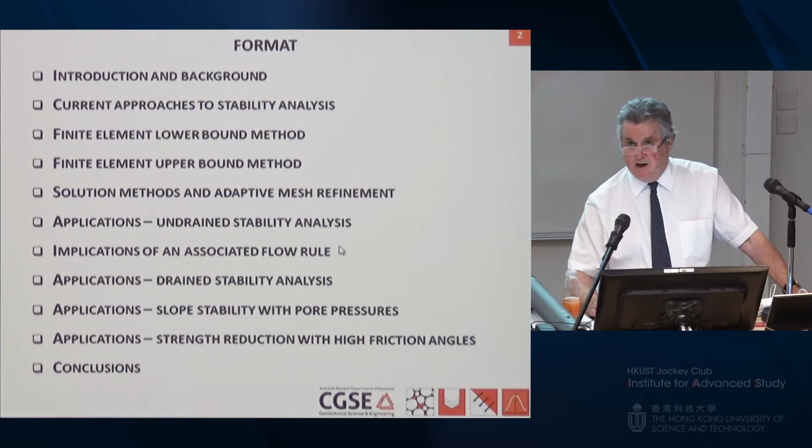Then I'm going to do some applications for undrained stability analysis, then look at the implications of an associated flow rule. For high friction angles, there's always a question: can we use these techniques for those types of soils and geomaterials in general? Then some drained stability applications, then slope stability where we incorporate pore pressures - this is a very recent development - finishing up with strength reduction for materials with high friction angles, and then some conclusions.

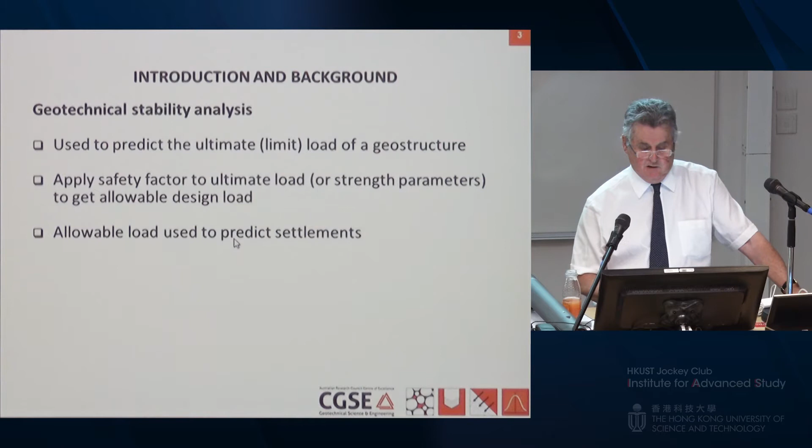Geotechnical stability analysis is used to predict the ultimate load capacity of a geostructure. Once we have that, we typically apply a safety factor to it, or to the strength parameters, to get the allowable design load or working load. Once we have that allowable load, we can use some other technique, such as displacement finite elements or even theory, to predict the settlements for the design structure.

Four common causes of geotechnical failure that I think are very important, probably the main ones: inadequate site characterisation, poor construction practice, activity after construction such as tunnelling in particular, and incorrect method of analysis. These are all very important, but today I'm just going to talk about this last aspect.

So why is it important? Well, first of all, we have cost pressures driving the engineering profession to use ever lower safety factors, and the social and economic costs of failure can be enormous and are increasing, as are the legal liabilities associated with failure.

There's also a community expectation that, hang on, engineers can put a man on the moon, surely we can design a retaining wall or a tunnel that doesn't collapse. So the community expects us to be able to deal with these sorts of problems involving complex material behaviour.

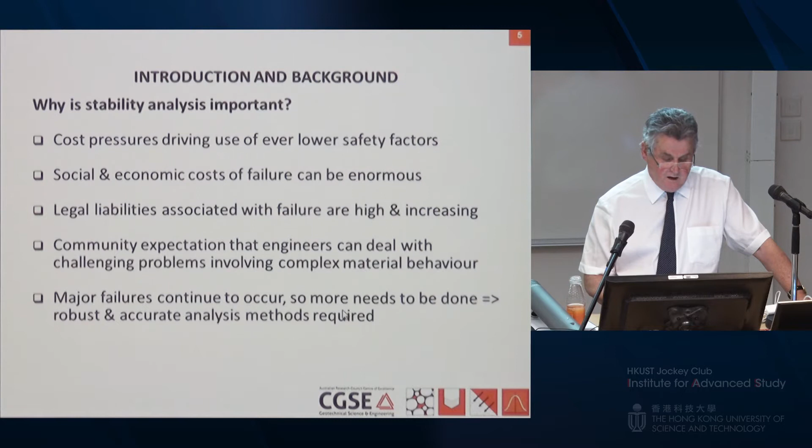However, we note that major failures still continue to occur, so clearly more needs to be done to develop robust and accurate analysis methods.

Excuse me if my throat is a bit froggy. I think I've picked up a bug in China where I've been for the last 2 weeks.

Examples of some failures. This is the road south of Sydney. This slip occurred after heavy rainfall. It cost about $50 million to fix that. It had to be completely rebuilt and re-anchored.

A Lane Cove tunnel collapse. This was part of a $1.1 billion project in the centre of Sydney. The heading collapsed, causing a depression to occur. This multi-storey building had to be evacuated, and it caused the partial closure of one of Sydney's busiest

arterial roads. Energy infrastructure failure. This is the Yallourn open cut coal mine collapse, 2007, 6 million cubic metres of material. That mine was 80 metres high, 500 metres long, and went so far back that it diverted the Latrobe River into the mine, causing partial closure of the mine, 20% loss of Victoria's power supply.

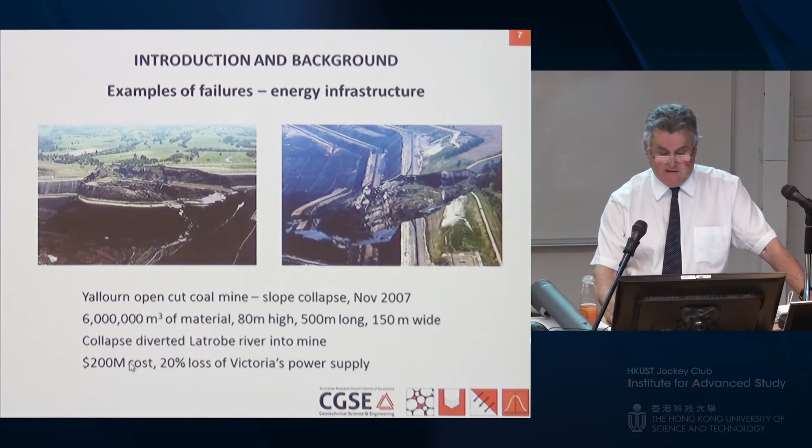Victoria is a state in Australia, a bit like a province in China, and so this was a massive cost and a massive loss to their power infrastructure.

Another failure, a Jackup rig failure off the coast of Kuwait, September 2002. This is where one of the legs punched through a stiff crust into a soft layer underneath, started to tilt, and eventually the whole thing sank. $350 million for that rig, and we're getting at least one of these failures every year, quite often two.

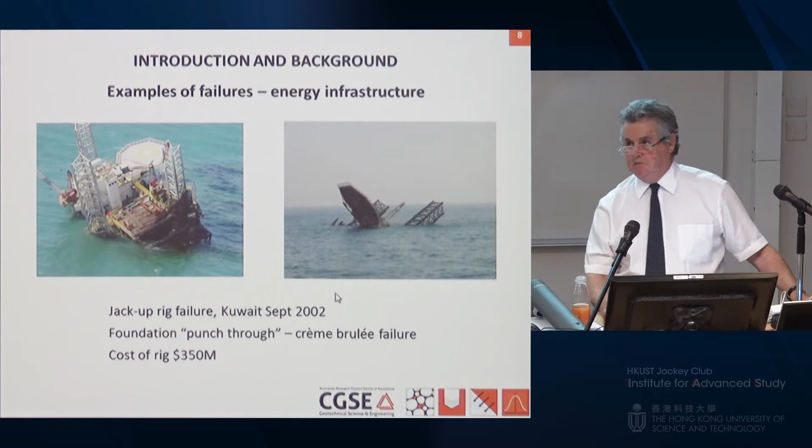So we still haven't got our stability analysis right. So let's have a look at current approaches.

Limit equilibrium, this is the one you all learn as undergraduates. Limit analysis, some of you will be familiar with this, where we have upper and lower bound theorems and we use analytical approaches to calculate those bounds.

Slip line methods, which are related to limit analysis, but we solve the governing plasticity equations using the method of characteristics. I'm not going to say a lot about this method, not because I don't think it's important, but because it's not possible to develop general purpose computer codes that employ it. You can get very important solutions out of them, and you'll see some of them in this talk.

And last but not least, nonlinear displacement finite element analysis, which everybody uses in lots of different areas in geotechnics.

So what are the key things about limit equilibrium? You have to postulate a failure mechanism in advance, and it could be a circle or a wedge or some other shape. You then optimise that geometry to get the critical safety factor. Huge number of methods developed.

Some of those are listed there, typically based on very simple soil models, such as Tresca or Mohr-Coulomb. Most of the methods are based purely on statics, not all of them. There's one or two important ones that aren't, but generally we tend to ignore the kinematics, and assumptions are required to make the problem statically determinate.

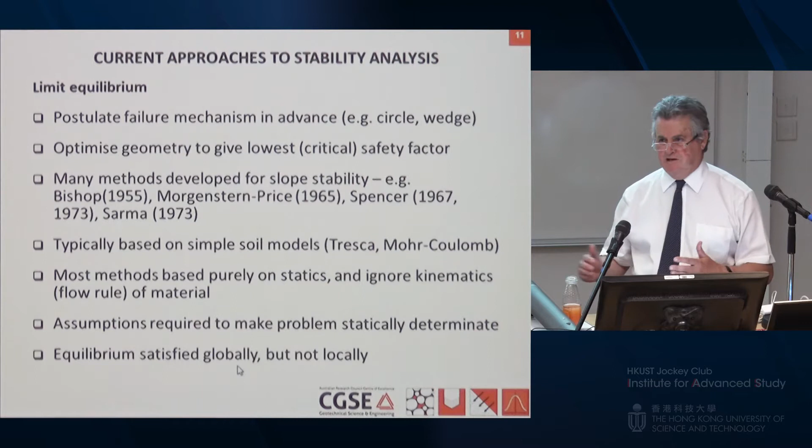And because equilibrium is satisfied globally, but not locally, we tend to get endless discussions about my limit equilibrium method is better than yours. And being the editor of a journal, I still get lots and lots of papers on this theme.

Conventional limit analysis. Okay, it's founded on the upper and lower bound theorems of plasticity. We assume a perfectly plastic material with an associated flow rule.

So this is the stress-strain response that we assume. So the strength is typically given by this cohesion and this friction angle phi.

The yield surface in stress space typically looks like this, and we have these plastic strain rates, epsilon p, being normal to the yield surface. So that's what we mean by associated flow. The plastic strains are associated with the yield surface. The gradient of the yield surface, df by d sigma, I'll write as grad f through the rest of this lecture.

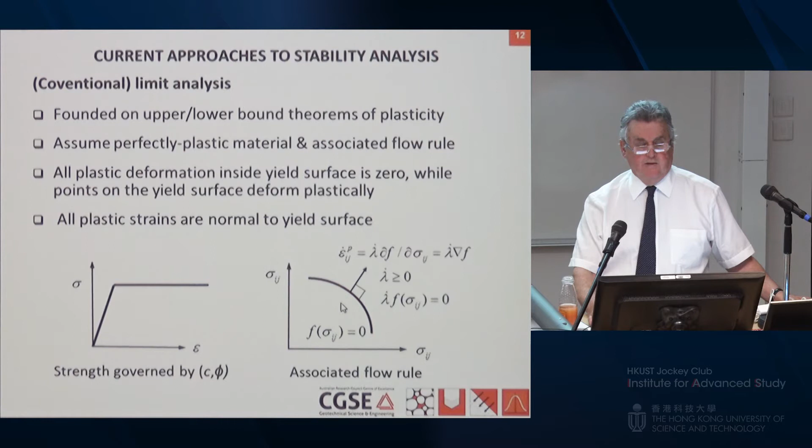And we have a plastic multiplier, which is non-negative, and we have this consistency condition here that must be satisfied. That basically says that the only time you get plastic yielding is when you get on the yield surface and you stay on the yield surface. Anything inside the yield surface, you have non-plastic deformation.

Okay, the lower bound theorem: all we do is forget about kinematics. We find a statically admissible stress field which satisfies three things: equilibrium, the stress boundary conditions, and the yield criterion.

You can have stress discontinuities. A stress discontinuity is a bit of an abstract concept, but it's basically a discontinuity where the shear stresses are continuous and the normal stresses are continuous. But if you take a plane at right angles to the discontinuity, then the normal stress on that plane can jump.

We know from the lower bound theorem that if we find such a stress field, we get a safe estimate of the limit load, and moreover that although the true limit load is unique, finding the best stress field is hard, particularly for complex practical problems. What we're going to do is describe methods that do that automatically.

Upper bound: we do a completely different approach. We ignore statics altogether and just focus on kinematics. The only thing we look at here is finding a velocity field which satisfies the flow rule and the velocity boundary conditions.

Engineers often have trouble thinking about velocities instead of displacements, and strain rates instead of strains. The reason we talk about rates is because for our ideal material at collapse, the strains and displacements are unbounded — undefined, because they can be infinite. So if you talk about rates, everything is well defined.

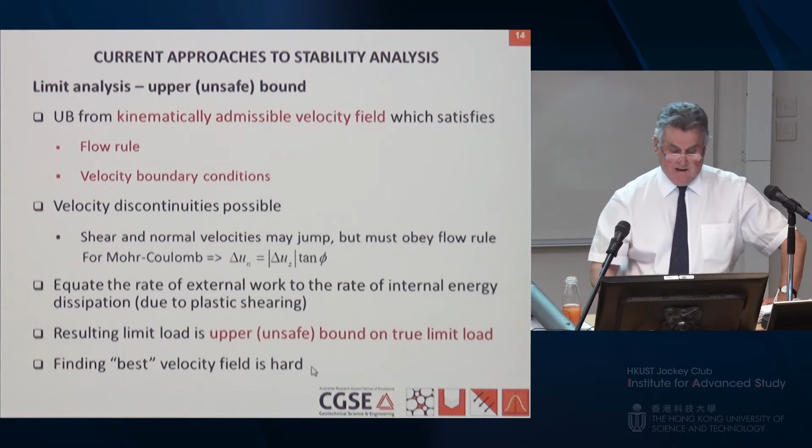We have a uniqueness theorem: we know that the limit load for that velocity field is unique.

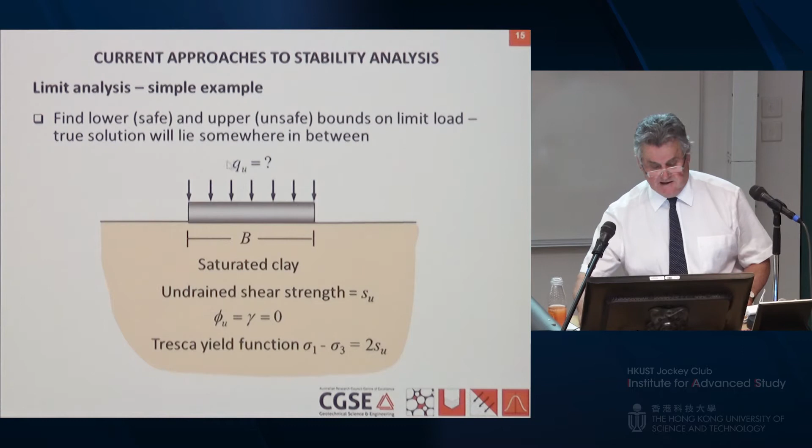Let's look at a very simple example: a strip footing on saturated clay, obeying the Tresca yield condition, weightless, with undrained shear strength SU. What we want is this bearing capacity, QU.

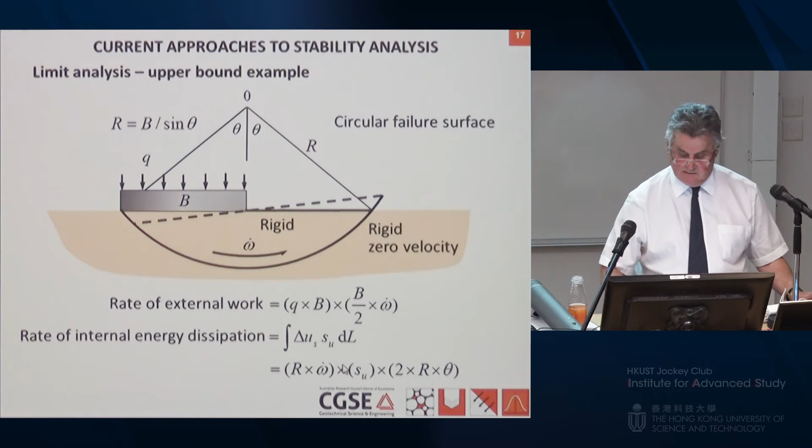That's the force. The rate of energy dissipation is just equal to the integral of the velocity jump, and we know that must be r omega dot, because that's the tangential velocity just inside this discontinuity, and of course it's zero outside. So we integrate that expression over the length - that's the velocity jump and that's the length - and we equate that to that, then minimize with respect to theta.

So we end up with an expression for QU, and we get a value of 5.52 SU. So with that very simple calculation, we've established that the limit load must lie between 4 and 5.52 SU. If you take the average, it's about 7% below the exact solution of Prandtl of 2 plus pi, or 5.14 SU. Now these techniques are very powerful, but they're a bit of a bear to apply to practical problems because you can't always get good solutions, and we're going to develop methods that do it automatically.

Nonlinear displacement finite element analysis - we'll talk a little bit about this. There are two ways you get the limit load. The first one is you just apply the load, keep incrementing it, plot up the load deformation curve, and hopefully your load deformation curve asymptotes towards a collapse load. It doesn't always do that, and so that can be a problem.

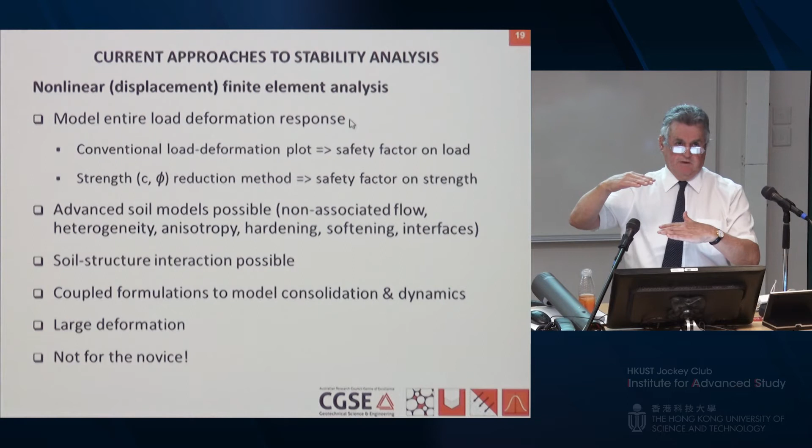The other way people often use these techniques is strength reduction. What you do is start off with your actual applied loads and actual strength parameters, and keep successively reducing those strength parameters, or increasing them in some cases, until you cannot maintain equilibrium - usually reducing. So that's another way of getting the collapse load. You're looking at the safety factor on the strength.

Advanced soil models are very possible. You can model all these sorts of features. You can handle soil structure interaction, coupled formulations with consolidation and dynamics, as well as large deformation. However, for stability analysis, my experience is that this is not a method for people who don't really understand the finite element technique, because you're really pushing the method to its limits when you try to use it for stability calculations. There have been lots of cases of disasters, like the Nicoll Highway collapse in Singapore, and numerous others where people got it wrong because they didn't know how to do the FE calculations.

So let's have a look at all these different methods, comparing limit equilibrium, conventional limit analysis, and nonlinear finite element analysis. In this table, green is generally good. We see that the nonlinear FE technique is the only method that doesn't require us to presuppose a failure mechanism - it finds it automatically. The lower bound method is the only one that satisfies equilibrium everywhere.

In displacement FE, you only satisfy equilibrium in a weak sense, at the nodes. In terms of the flow rule, only a rigorous upper bound solution satisfies the flow rule everywhere. In finite element calculations, you only satisfy it at the integration points.

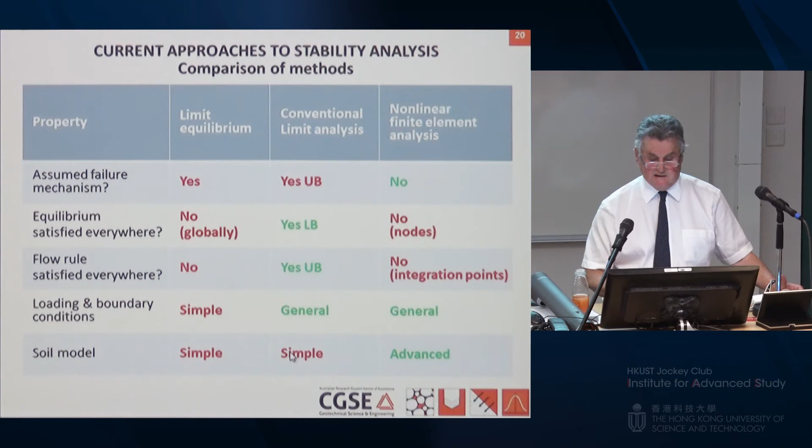Generally, conventional limit analysis and nonlinear FE have the most powerful capability for handling different loading and boundary conditions, and nonlinear FE is certainly the method of choice for implementing complex soil models. The other two are restricted to fairly simple models. So those are the advantages and disadvantages, if you like, of all these different techniques when we're looking at stability.

And what we're going to describe is finite element limit analysis, which is now commonly called FELA. It provides rigorous bounds, upper and lower, on the loads. No prior assumptions are needed about the failure mechanism. It's based on finite elements, so you can handle general boundary conditions, loadings, and geometries. It only requires the strength parameters, which is good for practical engineering, because that's what engineers tend to know best - they know the deformation parameters with much less certainty.

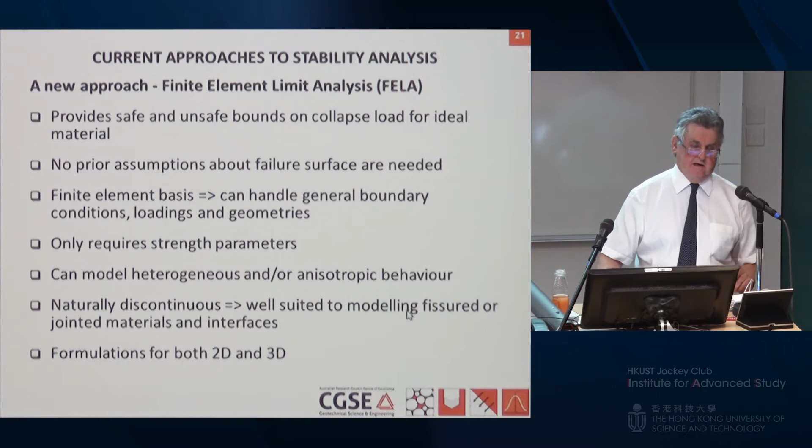You can model heterogeneous and anisotropic behaviour. The methods are naturally discontinuous - you've already seen that with our simple example. So you can model fissured or jointed materials and interfaces, and you'll see in our examples where we do this, and you can get formulations for both 2D and 3D. So you get the best of both worlds with this technique: the power of the FE technique, but with inbuilt upper and lower bounds, so you have an idea of what your errors actually are in the solution.

Okay, I'm now going to spend about 15 or 20 slides explaining these methods, because they are very, very different to the displacement finite element approach.

So this is what we typically have: our soil volume V. We might have some fixed surface traction, such as a ground surcharge T, and fixed body forces G, typically unit weights. What we wish to optimise is some unknown distribution of stress, which might be the bearing capacity, subject to fixed boundary conditions W on the velocities. The stresses in this domain must satisfy the yield condition.

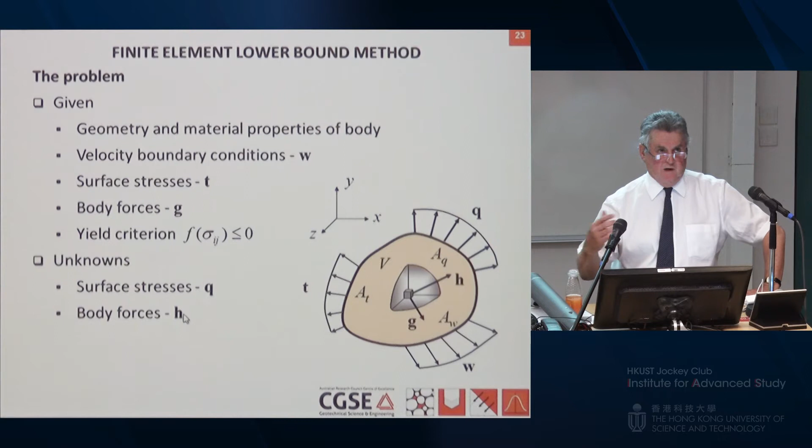So the quantities we wish to optimise, Q and H, have very physical meanings, as you've just seen for that simple footing problem. Now in the lower bound, we typically have an integral: the load supported by the boundary stresses we optimise, and the load supported by the body forces we can also optimise. The stress field must satisfy the three lower bound conditions, and the load carried by that stress field gives us a rigorous bound. All of these methods give rigorous bounds, not approximate, but rigorous.

So how do we do it in finite elements with the lower bound? We introduce a finite element approximation to model the stress field, and then optimise that stress field to give the highest lower bound. Let's have a look at the type of element that we use.

In 2D, it's this three-noded element, with three unknown stresses at each node, and two unknown body forces, typically unit weights, in the X and Y directions. In 3D, we have this element based on a tetrahedron, with linear stresses and constant body forces.

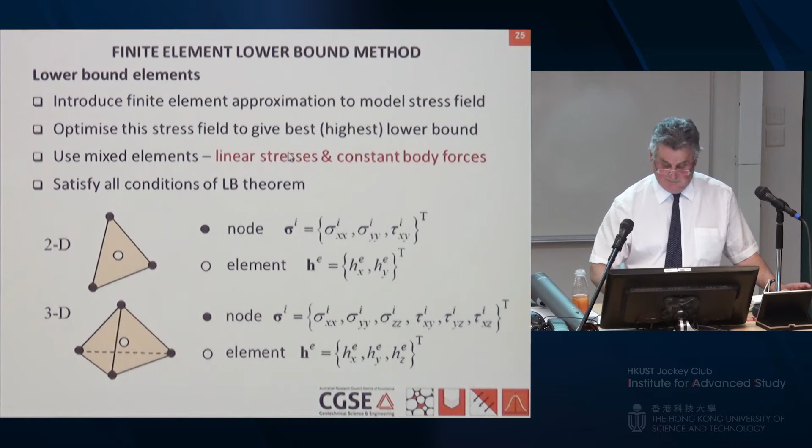Here's a typical grid, that simple example we looked at before for our footing. We have an axis of symmetry down the middle, and what we wish to do is optimise the linear distribution of this stress. We only have a linear distribution because we've only got linear distribution of stresses in the elements, and we wish to optimise that stress to optimise the load, in this case the load acting vertically downwards.

All of the stresses must satisfy equilibrium in all of these brown solid elements, as well as the discontinuities, shown as these white elements. We must also satisfy the stress boundary conditions at those nodes, and the stresses at every point inside this domain must satisfy the yield condition.

Now, two things to note straight away: each node is unique to a particular element, very different to displacement finite elements. Not only that, but we have multiple stresses, multiple nodes sharing the same coordinates. That's a bit disconcerting, because at any particular coordinate you may have a multiplicity of stresses. It's not the standard approach we have in continuum mechanics.

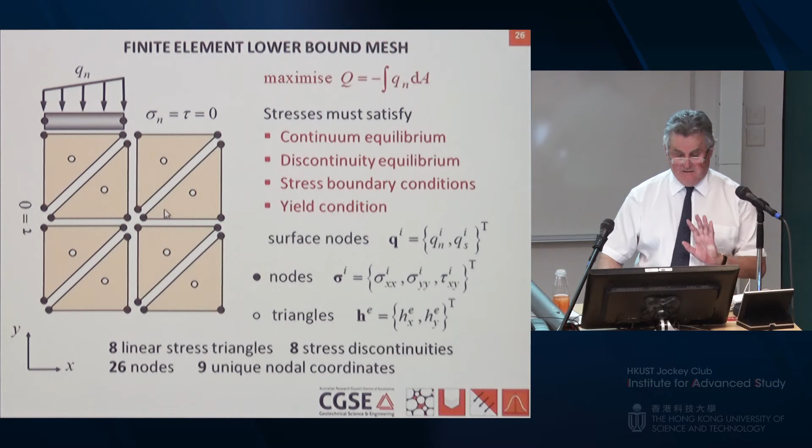There's the face I recognise. So that's a very different mesh to what we normally have, fundamentally different to displacement finite elements.

So how do we express the load in terms of the Cartesian stresses? We know along an element edge we have these local components Qn and Qs, normal and tangential to the edge, with a linear variation. Because we have a linear variation, we can calculate the load Qn and Qs just by multiplying by the length and taking the average.

These local applied tractions that we're going to optimise are related at each node to the Cartesian stresses by the standard stress transformation relation. So these are the unknown stresses; we feed these equations in, and we can express these loads purely in terms of those unknown stresses, which we then optimise to maximise the load Qn or Qs, or both. We can have very complicated series of edges; the only restriction is that over each edge they're piecewise linear.

How do we handle continuum equilibrium? We know that in each triangle there are two equations of equilibrium in the x and y directions, remembering that G is a fixed body force, so that might be a fixed unit weight, while H is a body force that we may wish to optimise. The stresses are varying in a linear fashion, giving us the two equations.

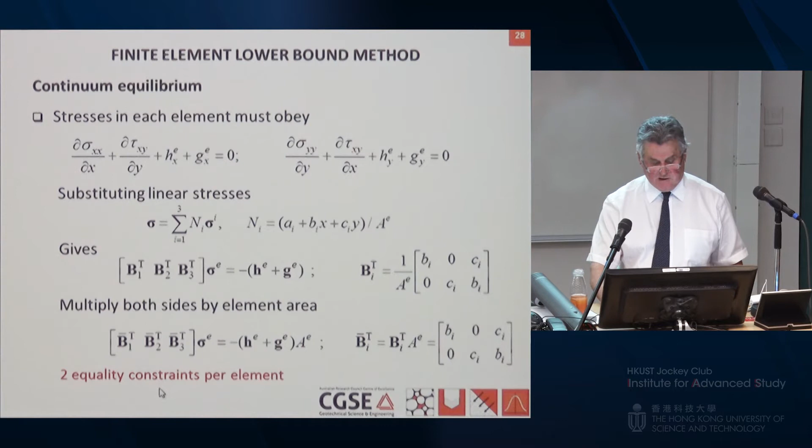Let's have a look at our stress discontinuities. So what we've got here is our standard triangles, and you saw those white elements before in our grid. They're comprised of 2 discontinuity elements, D1 and D2. Now these elements will be treated exactly the same way as the standard continuum elements.

So the real trick here is that we end up with 4 of these equality constraints by imposing this condition at each of the 2 nodes. And we don't need to make a distinction between the solid elements and the discontinuities. We just let those discontinuity nodes collapse, and we automatically satisfy discontinuity equilibrium, as well as satisfying equilibrium in the solid elements themselves. So that's a very neat way of implementing it.

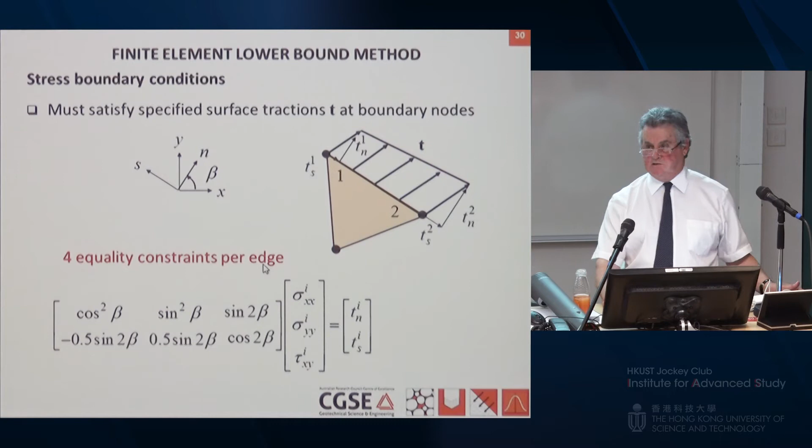So we have one set of equations at that node, another set at that node. So we have 4 equality constraints per edge to satisfy a general linear variation.

Yield conditions. We've got to satisfy the yield condition at every point inside these triangles. How do we do it? Well, first of all, we know that this yield surface is convex. We know that we have a linear variation of the stress, so we only have to satisfy the yield conditions at the nodes. We automatically satisfy equilibrium at every point inside, automatically satisfy the yield condition at every point inside that triangle. So we have 1 inequality constraint per node.

Boundary interfaces. What about how do we handle a boundary interface where we might have a different yield function that we want to model? You'll see an example of this where we look at some quite complicated ones. We simply use those collapsing elements again, but we specify a different yield function at the nodes, say adjacent to this footing or some other retaining wall or whatever. So we can handle interfaces.

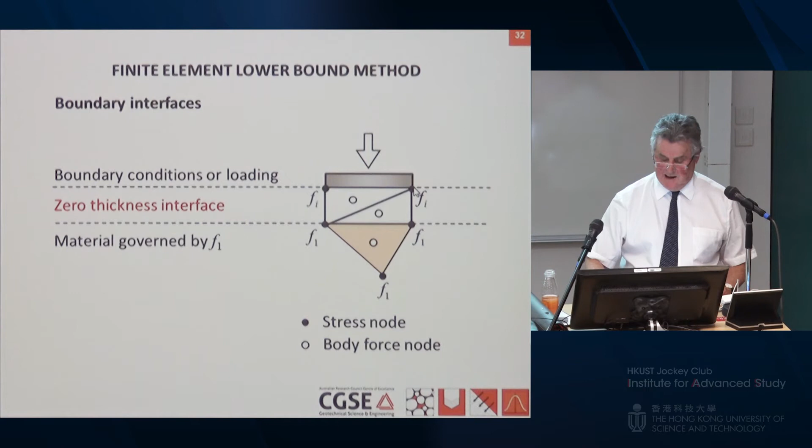Now when you go through and sum all of those things up, you end up with this rather ugly looking problem here, which is this is the objective function. We're going to maximise that, and that's the collapse load, and that's the load supported by the boundary stresses.

That's the load supported by the body forces that are unknown. All of these coefficients C1, B1, and the A matrices are simply functions of the nodal coordinates, so they're constants. So we maximise that load subject to the equilibrium conditions in the elements, discontinuities, the stress boundary conditions, and we have one of those yield inequalities imposed at each of the nodes.

Now these optimization problems can be huge. We regularly solve problems with millions of nodes and millions of constraints, and you'll see some of the grids later. The reason we can solve these things very efficiently is because of the advances in optimization.

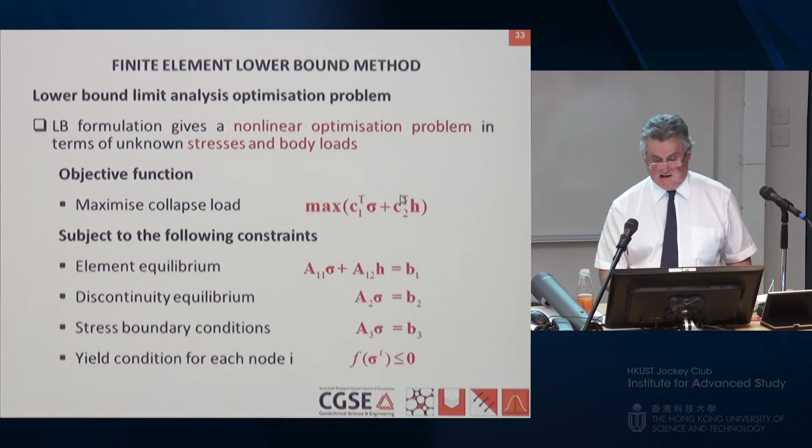So that's the lower bound, the upper bound. We forget about statics, we're on to kinematics. What we do is we minimize this quantity W. That quantity is just the dot product of the stress by the plastic strain rates - that's the plastic dissipation, the rate of energy dissipated due to plastic shearing. We minimize that, but we have to subtract off the rate of work that might be done by any fixed tractions or body forces. These strain rates and velocities must satisfy the flow rule and the velocity boundary conditions. Once we've minimized that, we equate it to the rate of work done by the unknown boundary stresses Q or any unknown body forces H, just like we did for that footing problem. Remember, we calculated the external work rate, calculated the energy dissipation, equated them, and then minimized it. That's all we do.

We use finite elements again, but this time to model a velocity field. In 2D, we have these triangles, with 2 unknown velocities in the x and y directions, and we introduce a constant stress field in our upper bound. We don't have to do this, but the reason we do it is because it provides a very easy way to calculate that dissipation, since we just want the dot product of the stress times the plastic strain rates. It also allows us to calculate an exact error estimator, which you'll see very shortly.

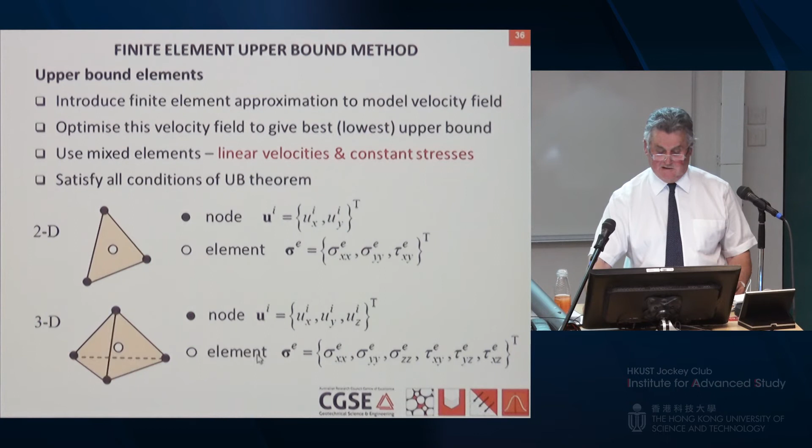In 3D, we use tetrahedral elements with these unknowns associated with the nodes and the unknown stresses at each element. So the velocities are linear, but the stresses are constant.

So this is the thing that we're going to minimize - the objective function. This is the power dissipation, and this is the rate of work done by the fixed tractions and the body forces G. Look at this term here: we know the stresses are constant.

So for each element, we can reduce this integral to a triple dot product, since the plastic strain rates are constant and we have a linear variation of velocities. The plastic strains are related to the unknown velocities for the triangle by the strain displacement matrix, so we end up with this triple product, which we can also express using those B bar matrices from the lower bound, where B is just the strain displacement matrix multiplied by the element area or volume. For these terms, if you grind through the maths, with a linear variation of T and U and fixed body forces, you can evaluate these integrals, and it reduces to a term like this. This vector U is just the vector of unknown velocities for the triangle - we have 6 of those for our 2D case - and C is just a vector of constants.

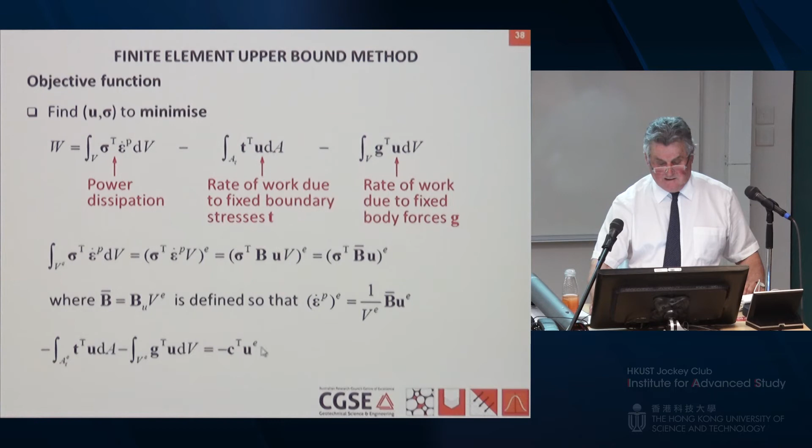So that's the thing we're going to minimise. The flow rule: we know our velocities vary in a linear fashion using those linear shape functions, so they just give ux and uy at each point. We feed those into these equations and do the differentiation.

Remember our flow rule, and we have the consistency condition that must be satisfied. Those are the flow rule conditions each triangle must satisfy. So what we can do is use that trick again where we multiply all these equations by the element area, so these plastic multipliers become alphas. Those are the equations we impose.

So we have 3 nonlinear equality constraints there, 1 nonlinear equality constraint there, and 1 inequality constraint there. Overall, we have 4 nonlinear equality constraints and 1 inequality constraint that we must impose.

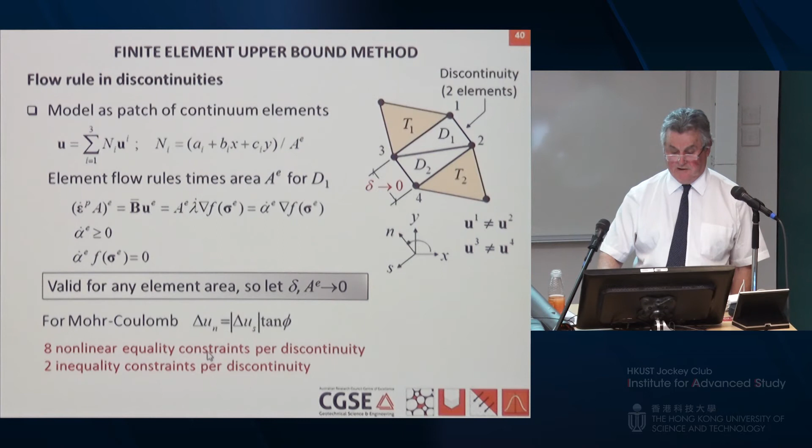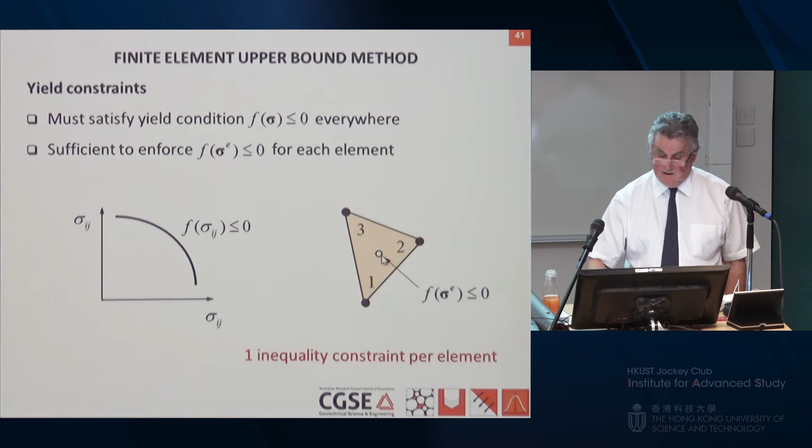Yield conditions: we have a constant stress, and we just impose that the stresses must lie inside the yield surface for that element. Interfaces: we can impose a different interface condition, and we'll give an example of that using those zero-thickness elements again. That's what we end up with, this rather ugly looking optimization problem. Sigma is unknown, U is unknown, and these alphas, which are related to the plastic multipliers, are also unknowns.

That's the energy dissipated due to plastic shearing — that's the first term — and this is just the rate of work done by any fixed loads. These are the flow rule conditions. They're the velocity boundary conditions where we know A and we know B, and that's the yield condition. Again, these nonlinear problems can be absolutely huge, millions of unknowns and millions of constraints.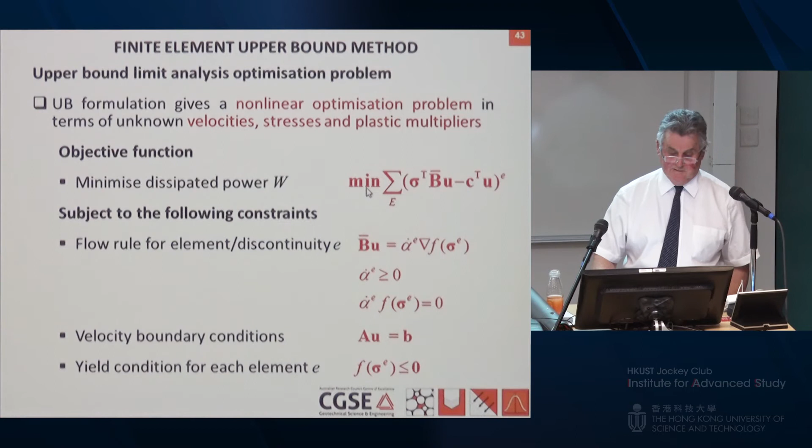Right, well, that's all very well and good. That's how we formulate them. Hopefully you can get an idea of how different they are to standard displacement finite element techniques, but how do we solve these optimization problems?

Well, we choose an optimization solver depending on the type of yield condition. If we've got Hoek-Brown, for rock mechanics problems, we can use a quasi-Newton type of solver. If we've got von Mises, Drucker-Prager, or 2D Mohr-Coulomb, we can use a technique called second-order cone programming. These techniques are very fast and can handle discontinuous yield surfaces. And if we have 3D Mohr-Coulomb, we use semi-definite programming.

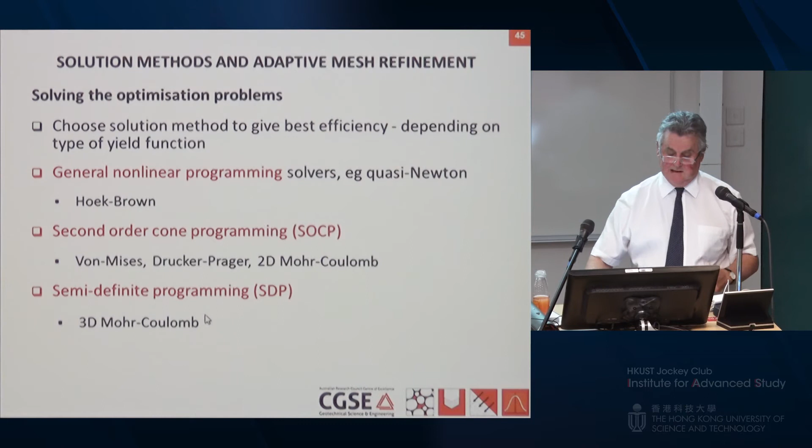The last bit of theory for a while: how do we adapt the mesh? We've got our mesh and our upper and lower bounds, but how do we know we're actually going to get decent upper and lower bounds? The methods are useless if we can't get close bounds.

Well, it turns out that we use the same mesh for the upper and lower bound calculations; we don't use different meshes. And it turns out that if you do that, you have an exact estimate for the contribution of each element to the gap between the upper and lower bounds. That contribution is given by this delta quantity, so that's just the dissipation.

We know that for each element, we know the stresses and the plastic strain rates from the upper bound. We do the same for the lower bound, using the upper bound strain rates but the lower bound stresses, and derive this equation. Using the virtual power theorem, for a unit rate of external work, if we sum those delta quantities, we get a direct estimate of the gap between the upper and lower bound.

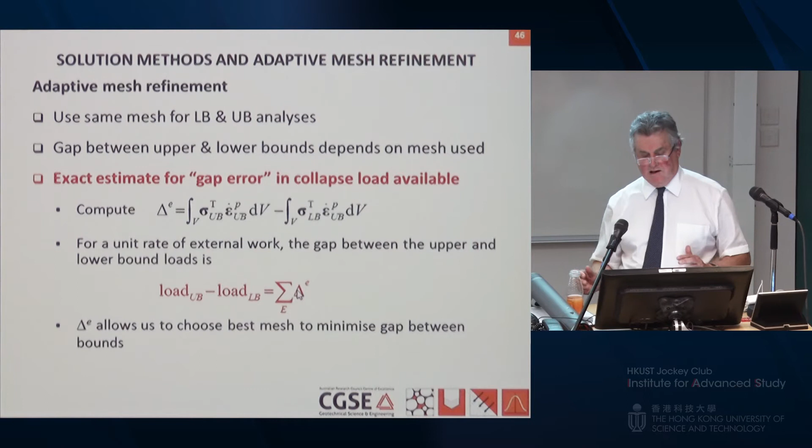So how do we make a fast solution? We make the size of the elements inversely proportional to those delta quantities. That's the only nonlinear problem that I know of where we've got an exact error estimate.

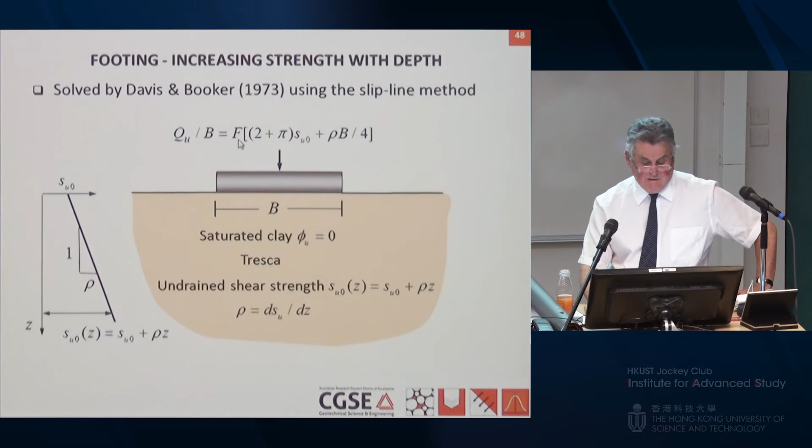Okay, let's have a look at these things. We looked at the Davis and Booker problem: plane strain, strip footing, Tresca, strength increasing with depth. Undrained shear strength at the surface SU0, rate of strength increase with depth rho. Davis and Booker showed that you can express the bearing capacity using this equation here. So that's the Prandtl type of contribution, and this is the contribution due to the strength increase. This factor F depends on whether the footing is rough or smooth.

So we looked for bugs in the code. We spent about a month and a half looking for bugs. We couldn't find any. We were very confident the results were consistent because we had such tight upper and lower bounds.

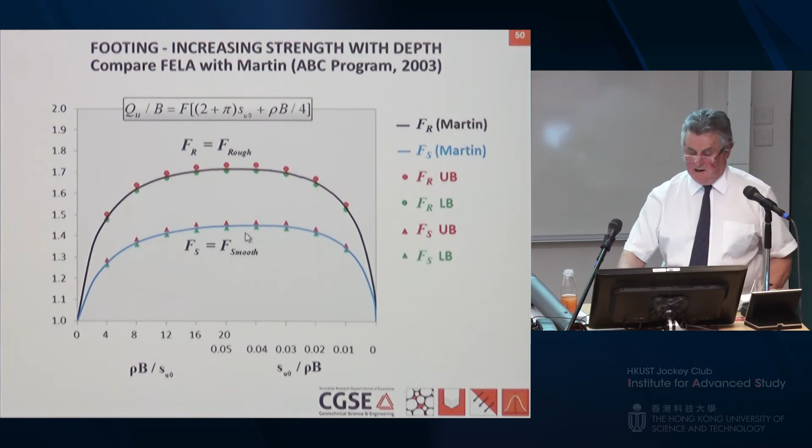We subsequently showed that these upper and lower bounds from Chris's program are in fact exact solutions. So these are the exact solutions, and we're getting very good agreement with our upper and lower bound results.

We compared our limit equilibrium solutions from Raymond with our finite element limit analysis solutions.

These circular failure surface methods are also very widely used. We've got this ratio between the limit equilibrium and FELA results, and as you can see, for the case where we have a uniform shear strength, the limit equilibrium results are all right. But for the rest of the plot, they're typically out by factors between 2 and 4.

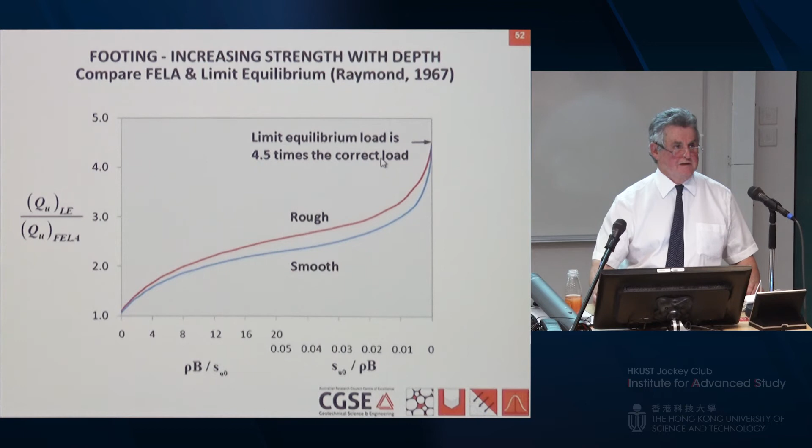So the limit equilibrium solutions are absolutely terrible for this case, even though they're theoretically rigorous limit equilibrium solutions. In fact, for the case where you have zero shear strength at the surface, they're 4.5 times what they should be.

Well, why is this? You look at the failure mechanisms, look at the one on the right-hand side here. I've plotted up the power dissipation from our upper bound calculation. This gives a very visual indication of how these things fail.

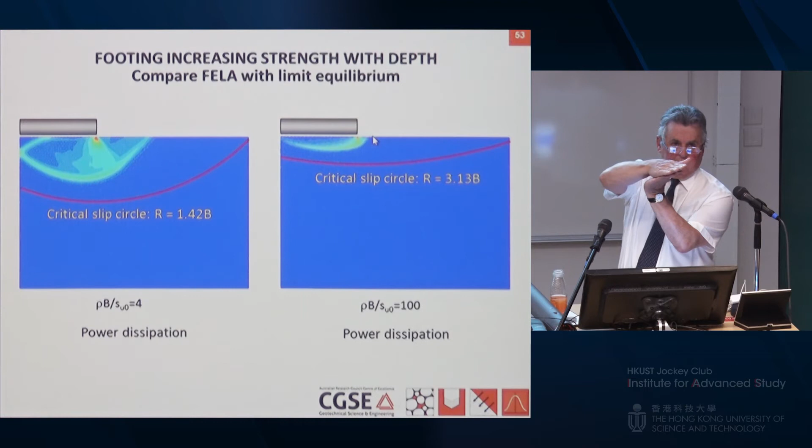What you can see is for the case where you've got a very low shear strength at the ground surface, the soil's just being squeezed out from underneath the footing. You're not getting a deep-seated failure mechanism at all. And you compare with the Raymond analytical failure surface, it's miles off. It can never, ever get the exact solution.

That's the problem with limit equilibrium methods. You never know how good they are unless you have some other thing to compare them with. These upper and lower bound methods, we get it straight away. So that's the Davis and Booker problem.

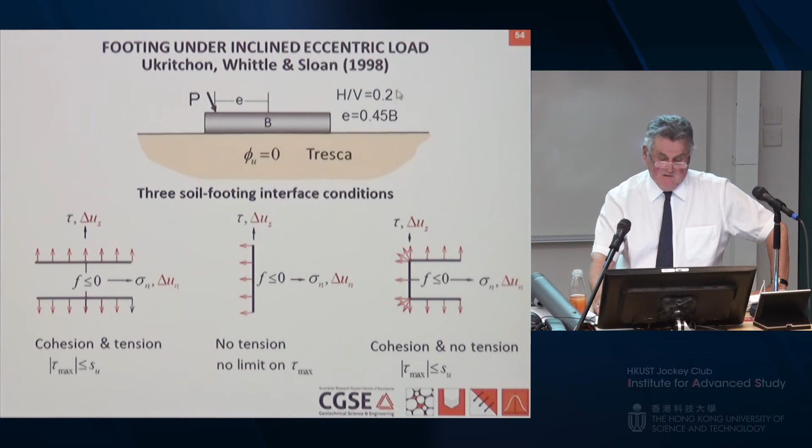Let's have a look at a problem that I did with our colleagues at MIT. We were looking at combined loading of footings, again on a Tresca material, this time uniform strength. We have an eccentricity of 0.45b and a ratio of the horizontal to vertical force components of 0.2, and we produced envelopes for a wide range of these parameters.

I'm going to look at 3 different interface conditions here, because that's what we often want to do in practice. This first interface condition is just your standard soil mechanics plot of shear stress versus normal stress, and that black line is just the standard undrained failure envelope yield surface. So that's just assuming we have a Tresca interface, so it can sustain both tension and shear being equal to, provided the shear stress is less than the undrained shear strength.

This one over here is the same as that, except we've put a tension cutoff. We're not going to allow any tension to occur normal to that interface. That's the case that you'd like to model.

Now these red arrows and red symbols, they're the velocities, and they just tell you which direction the velocity jumps must occur. In this case, you can see the only deformation you can have is in the shear direction along that interface. This one says you can have a whole range of them.

This case is a rather interesting one. We said, okay, we're not going to put any constraint on the shear stress on this footing, we're just going to insist that we don't have any tension. And that is just a single line, so the admissible stress space is over here. For this case, because you've got associated plasticity, all the velocity jumps must be normal to that interface, in the same direction as sigma n.

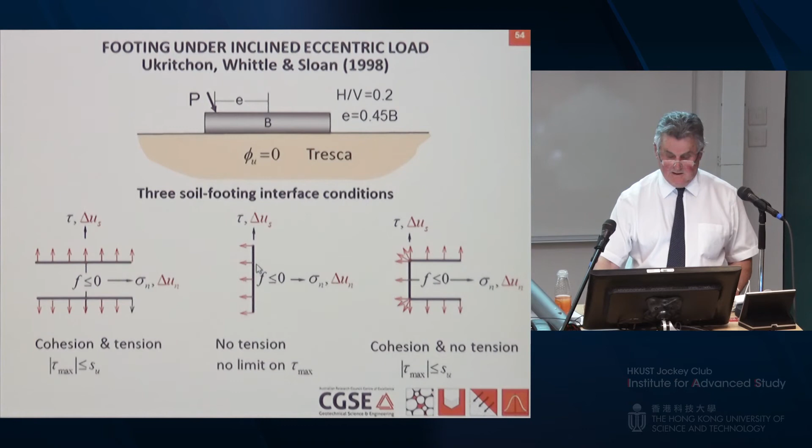Tunnels and tunnel headings. What we have here is strength increasing with depth, again with an undrained shear strength SU0. We've got our circular tunnel, cover C, diameter D, and we've got a ground surcharge.

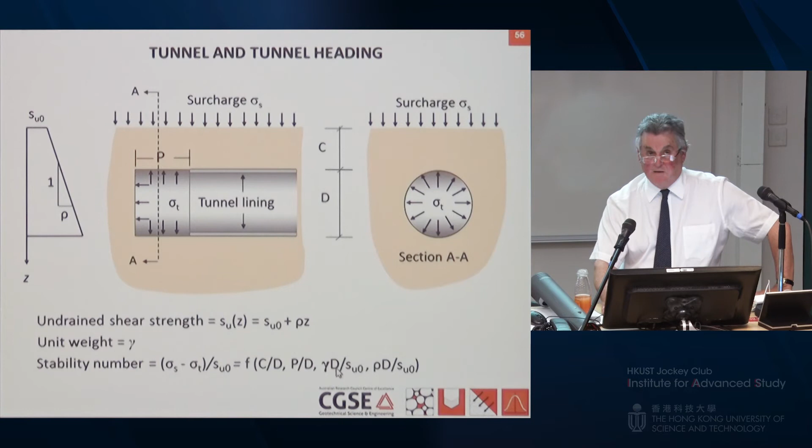2D case first. This is some work that a PhD student of mine did, and this is for the case where P on D is much, much greater than 1, so we're treating it as plane strain. This is the stability number, this is the dimensionless weight parameter, and these are the curves for various values of the strength parameter. So that's the uniform strength case, that line there, and that's the case with the maximum strength increase with depth.

So how would tunnelling engineers use something like this? Well, first of all, I should say that the upper and lower bounds are virtually indistinguishable. This is for a case of C on D of 4, and we did a whole range of C on Ds that are useful in practice.

So how engineers would use this: they know what their strength profile is, they know what this dimensionless weight parameter is, so you go in up there, read off what the stability number is. Once you've got that stability number, you typically know the surcharge stress, so you can work out what sigma t should be. Alternatively, if you know what your capacity for the tunnel pressuring is, you can work out what sort of ground surcharge you can support without collapsing.

That's the optimised grid for one particular case. As you can see, we're getting all the elements where you'd expect them to be.

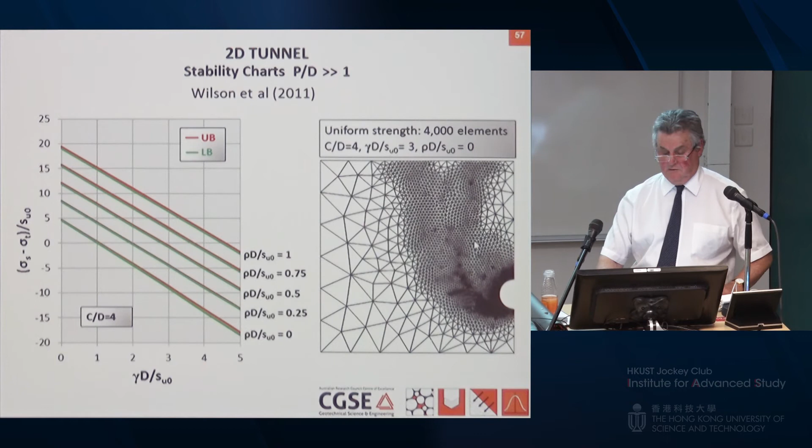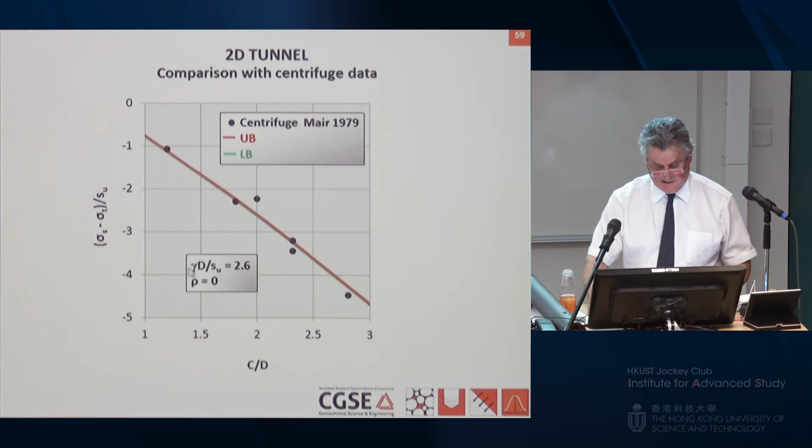We also compared with solutions, centrifuge results rather, from Robert Mair. This is the stability number for the uniform strength case. He presented his plots in a different way, using C on D for a specific case of this weight parameter, uniform strength. Upper and lower bounds are almost identical, and the centrifuge results are shown here.

These centrifuge results are widely regarded as being some of the best results that were obtained, and people often use them to check various calculations, and these gave us a lot of comfort. We're getting very good predictions from our upper and lower bound methods with high quality centrifuge tests done at Cambridge.

Well, okay, that's good for the 2D case. What about the 3D case? Excuse me.

Here we've got our normalised tunnel stress. So this is for the case where we don't have any ground surcharge. And we plot up that stability number, sigma T on SU, uniform strength, versus P on D. Remember, P is that unsupported heading length. As P on D gets large, you go towards the plane strain case. So at this end of the plot, you're at plane strain.

First thing, because we don't have a surcharge, sigma S and sigma T are resisting collapse, the upper bound calculation actually gives you a lower bound, and the lower bound calculation gives you an upper bound. It'll do your head in if you think about it too much, but that's the reality, because this load is resisting collapse, it's not causing collapse.

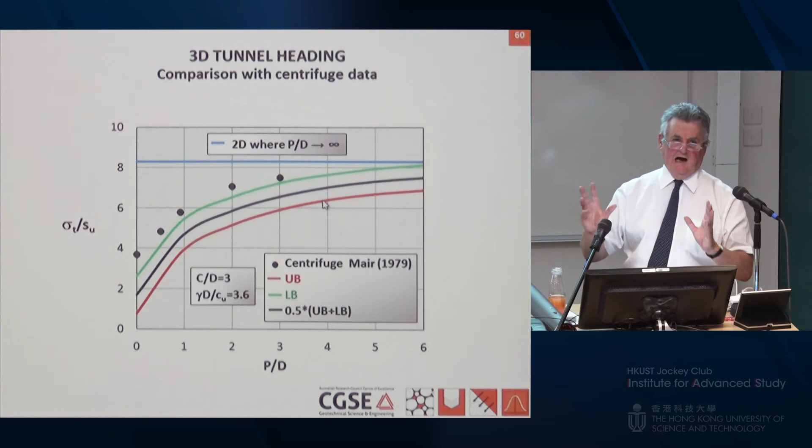We'd like to be able to get these bounds closer, but we've found that for 3D, the theory is great for optimizing the mesh. It doesn't change going from 2D to 3D, but when you try to do 3D optimization, you get disappearing elements, you get slivers. It's a very hard problem from a practical point of view. The theory is fine, but getting it to work in practice is different because you don't have the nice properties you have with 2D triangulations. But we're working on that so we can get better bounds for the 3D case. As you can see, both the upper and lower bounds asymptote towards the 2D case as P on D gets large, so you end up with a plane strain type problem.

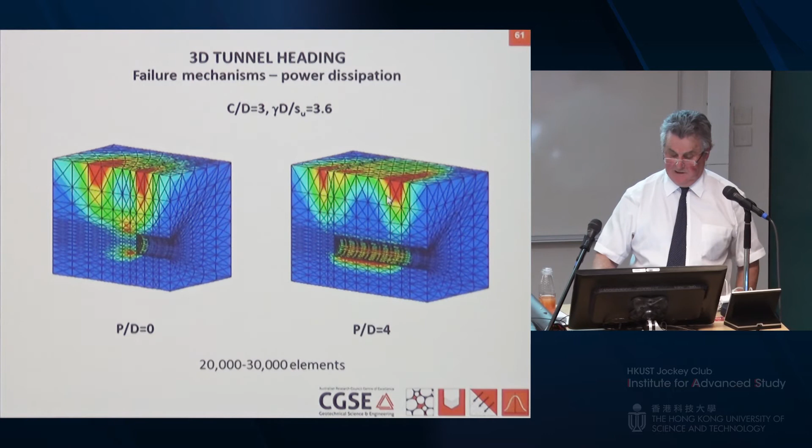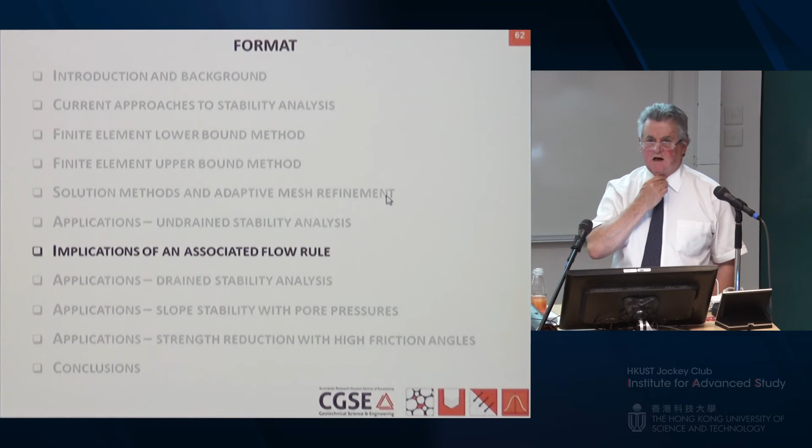Those types of calculations typically took about 3 to 4 hours to get our upper and lower bounds. We're still working on that, but if we could get the adaptivity going, we'd be able to get better bounds for less cost. But if you do a 3D finite element calculation, you'll probably be spending at least that amount of time, and maybe more.

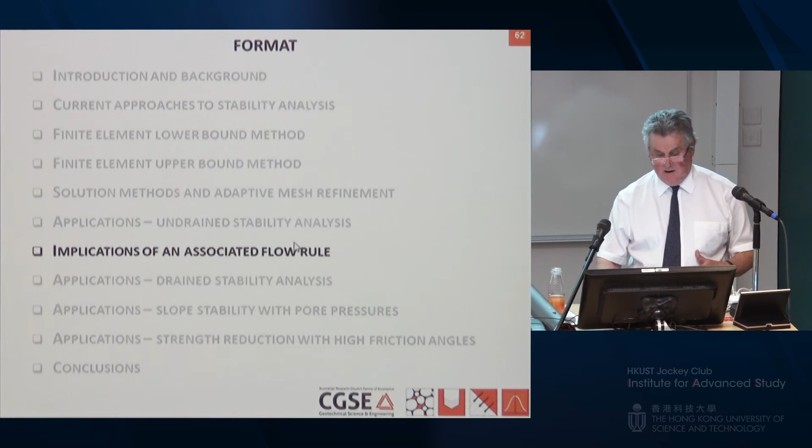Well, that's all very good. So we've given a whole bunch of applications for cases where we've got undrained loading. What about cases where we've got drained loading and we've got a friction angle?

Now that's a bit of a worry, because we know in practice the actual relationship between the normal and shear velocities is given by tan psi, where psi is the actual dilation angle. This dilation angle is often considerably less than the friction angle. Not only that, but as you shear the material towards failure, that dilation angle can go to 0 as you approach the critical state. So that raises the question - our assumptions don't particularly match what we see in practice.

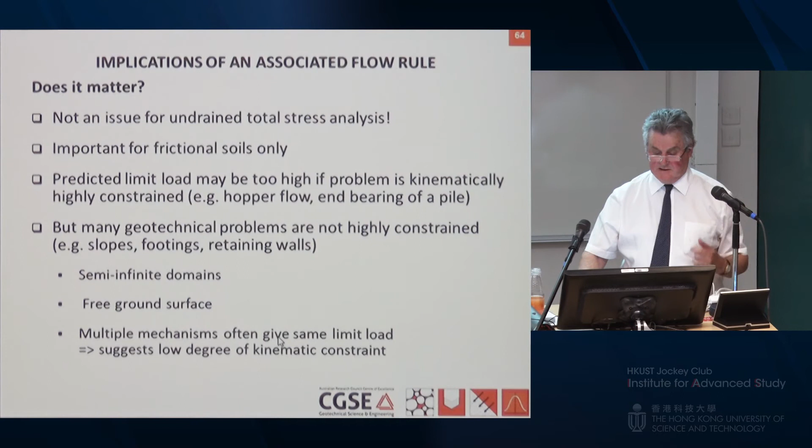What are the implications? Clearly it's only an issue for frictional soils, and the big concern is that the predicted limit load may be too high if the problem is kinematically constrained. So if you have a hopper flow problem or a cavity expansion problem, you can get a very big difference between the limit load from associated flow and non-associated flow. However, many geotechnical problems are not highly constrained, due to the fact we have semi-infinite domains and a free ground surface, and we know from plasticity theory that multiple mechanisms can give the same limit load. So that suggests we have a low degree of kinematic constraint.

Well, that still doesn't get us anywhere because associated flow over-predicts shear dilation. We can expect problems for soils with high friction angles.

How did he derive this equation? He looked at the Mohr's circle of failure in a characteristics net for a non-associated flow, and he proved that the shear stress is related to normal stress by those reduced strength parameters.

But as a number of people have shown, that approximation is a pretty good one, and in fact you can show that for a rigid block mechanism in non-associated material, where you've only got deformation occurring in the discontinuities, this approach will give you a rigorous upper bound on the limit load for your non-associated material, and Andrew Drescher and Emmanuel Detournay proved that in 1993.

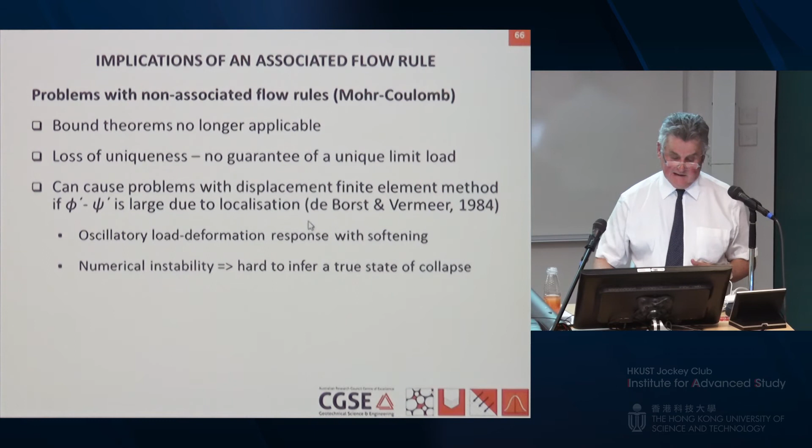So just to fix ideas on how these things behave, and to emphasize this idea of kinematic constraint, we're going to look at a biaxial test.

Height of the sample L, width B, rough platens, a short sample with L on B equal to 1, and a longer sample with L on B equal to 3. Friction angle 30 degrees and 3 different dilation angles: 0, 15 and 30 degrees, which is the associated case.

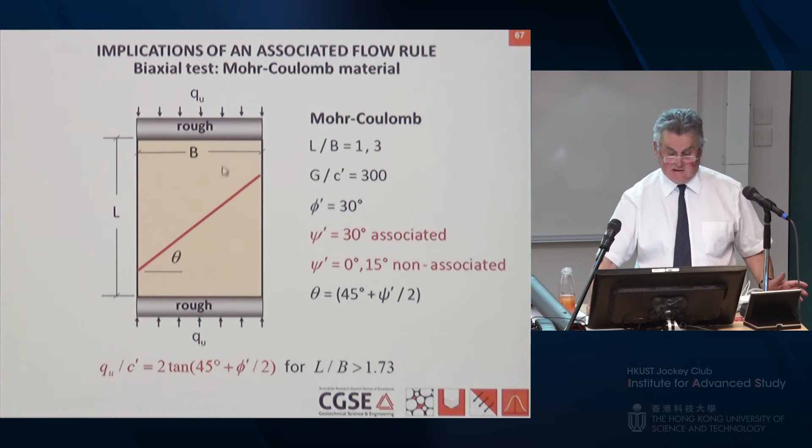We know that the actual failure plane is given by 45 plus psi over 2, where psi is the dilation angle. And for the associated case, the actual collapse load is given by this simple equation, provided L on B is greater than 1.73. Why? Because when that failure plane is at angle phi, you must have that length in order to stop the platens from interfering with that failure surface.

We first analysed this using our in-house finite element code, using the 15-noded triangles. Love them or hate them, they're everywhere in practice. They were developed by me in my PhD thesis and a subsequent paper. We showed that these elements are extremely good for predicting collapse, whether it's cohesive friction or undrained problems where you have constant volume. So we used a lot of these elements, 800 of them.

Here are the results: normalized pressure versus vertical strain. Just look at these blue curves first, for the long sample. The striking thing here is that the load deformation response and the collapse load is independent of the dilation angle. That is not what you'd expect until you think about it.

The reason is that for all of these cases with the longer sample, the failure plane can choose where it wants to go. So it's not highly kinematically constrained. And you'll see that in a minute when we look at these shorter sample results.

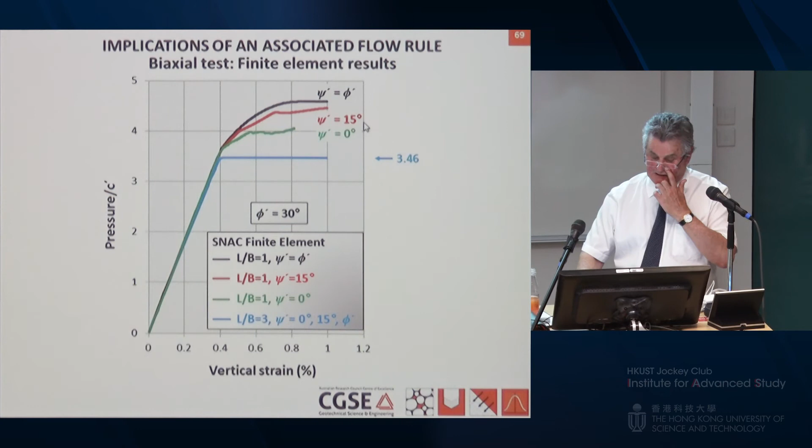So the take-home message from that illustrates the importance of kinematic constraint. If you have a problem that's kinematically constrained, the flow rule is really important. If you have a problem that isn't, then the flow rule is less important on the collapse load.

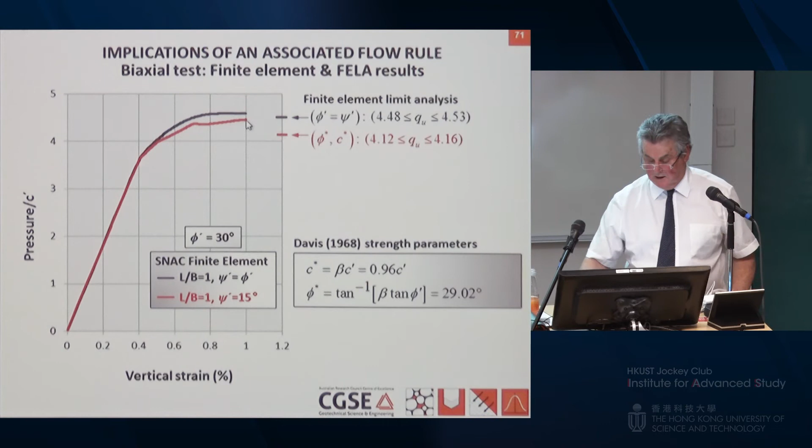This plot shows the same results again, but we're comparing the FELA results with the FE. For the associated case, we're getting very good agreement between SNAC and our FELA codes. For the non-associated case with a dilation angle of 15, we calculated these reduced Davis parameters and then did our normal limit analysis, getting those results in red. They're about 4 or 5% below the best estimate we can get from the FE calculations.

Okay, let's have a look at some applications. This is a drained case - an anchor in medium dense sand. You can show that the pull-out capacity QU is related to gamma H via this factor N gamma, not to be confused with N gamma for footing, and it's a function of the friction angle and this dimensionless quantity H on D.

We can't do axisymmetric analyses exactly with limit analysis because of the hoop term. So what we do is a three-dimensional slice - we used a slice of 15 degrees, and up to 14,000 elements.

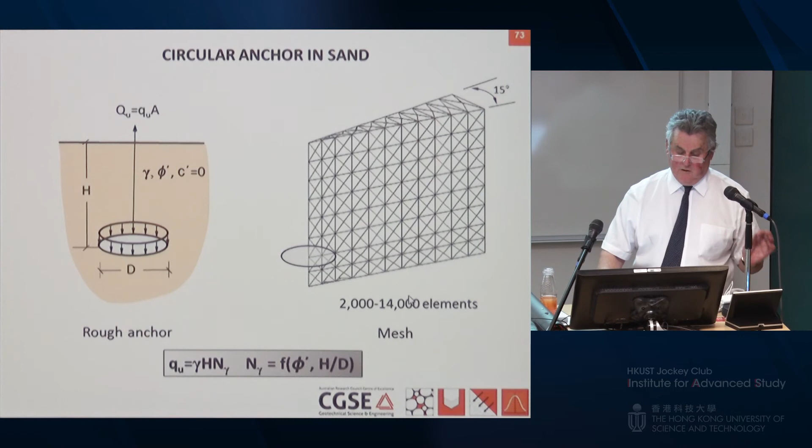So what we thought we'd do is compare our solutions with some laboratory data from chamber tests. This is N gamma on the vertical axis versus H on D. These black squares are from a master's thesis from Andrew Pierce for a sand with a friction angle of just over 43 degrees and a dilation angle of 13.6 over the relevant stress range.

He got some odd results here, which were later explained by the chamber effects. The values that he used - he'd done the samples too close to the edges.

We also looked at some results from Ilamparuthi used for circular anchor in sand, 43 degrees, and we got very similar results over most of the range.

We then did upper and lower bounds, but using this Davis approach. We know the friction angle is 43.1, the dilation angle is 13.6, so we can use those formulas to calculate beta and get a reduced value of the friction angle. First thing to note - we got nice upper and lower bounds, plus or minus about 3%, and they agree pretty well with the experimental data.

We also did some finite element calculations using SNAC, using the exact, actual measured values of the friction angle and dilation angle, and we got that black line there. We had a lot of trouble getting this line because we were getting some really big oscillations in the load deformation curve, so I don't have a huge amount of confidence in it - we had to do least squares simulations to estimate them, but that's the curve that we got.

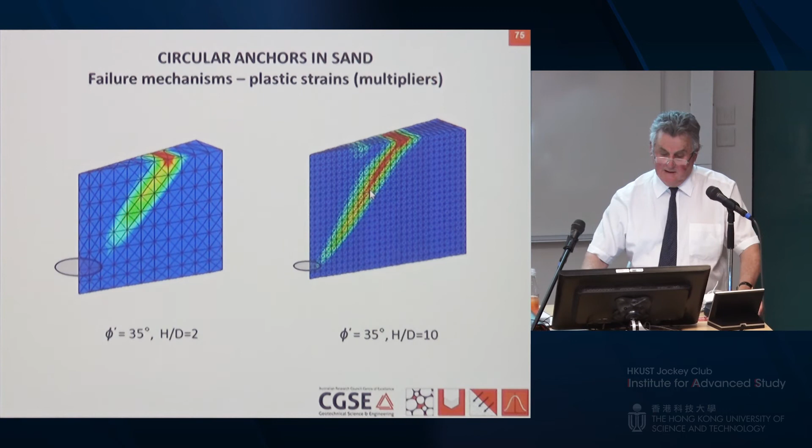For a shallow case and a deep case, you can see the deep case is much more localized, as you'd expect. Mohr-Coulomb case - circular excavation, height h, diameter 2r. The dimensionless stability number, NS, is a function of the friction angle and H on R.

We analysed it using this grid here, 8,000 elements, 15-degree slice. These are the upper and lower bound estimates for this stability number versus H on R. This curve here is for the purely cohesive case, almost identical upper and lower bounds, and quite an improvement on the analytical solution obtained by Britto and Kusakabe.

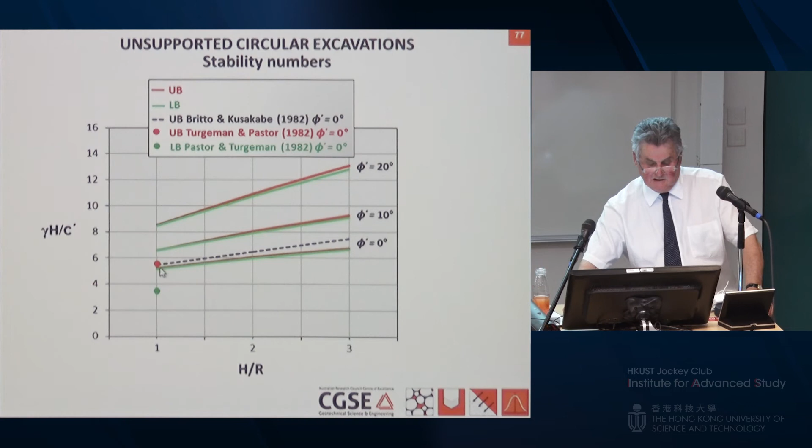For the other friction angles, 10 and 20 degrees - these are typical values for a silty clay - we're also getting good upper and lower bounds. I think the maximum difference we ended up with was plus or minus about 2% in any of those upper and lower bounds. But all of those solutions are significant improvements on these other upper and lower bounds provided by Turgeman, just shown by those dots there.

Failure mechanism - purely cohesive case, much more extensive, getting this trumpet failure mechanism again for the case where we had a friction angle of 20 degrees, much more localised and much more steep.

Now for these cases, when we plot up the failure mechanisms, we contour the plastic strains, not the dissipation. The reason we do that is we can look at the multipliers, and if you have a purely cohesive or purely cohesionless material, the dissipation is not defined, but the plastic strains and the multipliers certainly are.

Okay, so we can do undrained, drained, we can solve problems. What about incorporating pore pressures? How can we do it?

We've found that you can incorporate steady state pore pressures by solving the governing seepage equation using optimization theory. It turns out that these optimization problems we've been talking about for the upper and lower bound method can be used to solve the pore pressures. So we end up with a very similar upper and lower bound approach, and we use a similar solver. We can find the phreatic surface for unconfined flow, and the pore pressure mesh is the same as the mesh used for the upper and lower bound analyses.

So we use the same mesh for the upper and lower bound calculations and the pore pressures, and we adapt them all in order to get the solution. Strength reduction is used to compute the upper and lower bounds on the safety factor, and we use a hybrid adaptive meshing algorithm to minimise both the bounds gap, which I explained before, and we also calculate another error estimator based on the curvature of the pore pressures in the grid we use to calculate those. Then we take the minimum element size from those two estimators.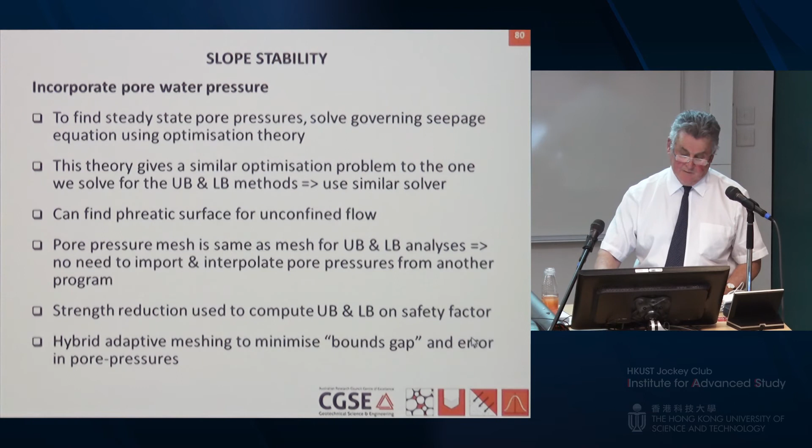So how do we do it? Lower bounds, 2D: we have our same nodal variables as before, except that we have this auxiliary pore pressure that's calculated separately to the upper and lower bound calculations. So we have linear stresses, linear pore pressures, and constant body forces. We impose equilibrium in terms of the total stress as well as the stress boundary conditions, and we make sure that the yield condition is satisfied at each of these nodes using the effective stresses because we've got the pore pressures in there.

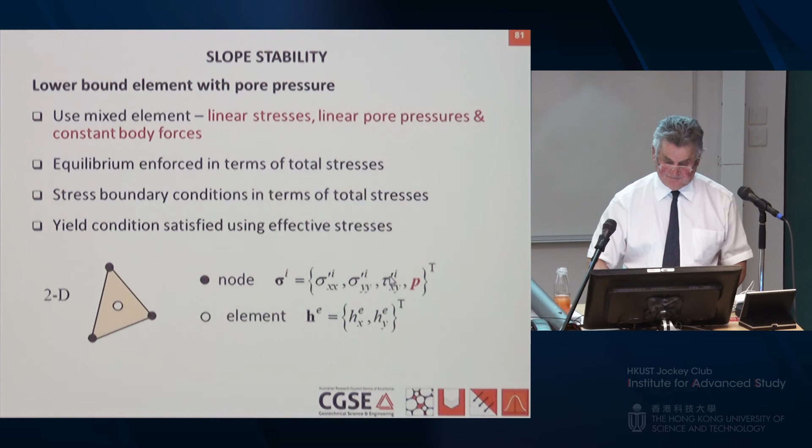Upper bound, same idea. For 2D, we just augment this unknown velocity field by a linear variation of pore pressures. In each element we have these effective stresses, so we enforce the flow rule in terms of effective stress, not total stress, because we've got pore pressures now. This work term, remember way back when we described the upper bound, that's the dissipation, the rate of work done by the fixed tractions T and these body forces G. We have to also take off this term due to these pore pressures. That's the relevant work term.

The gradient of the pore pressure is a constant, so this integral is very easy to evaluate. We just have to integrate the velocities over each triangle, and we can calculate that integral very easily, even if we've got velocity discontinuities. So that's the upper and lower bounds where we've got the pore pressures.

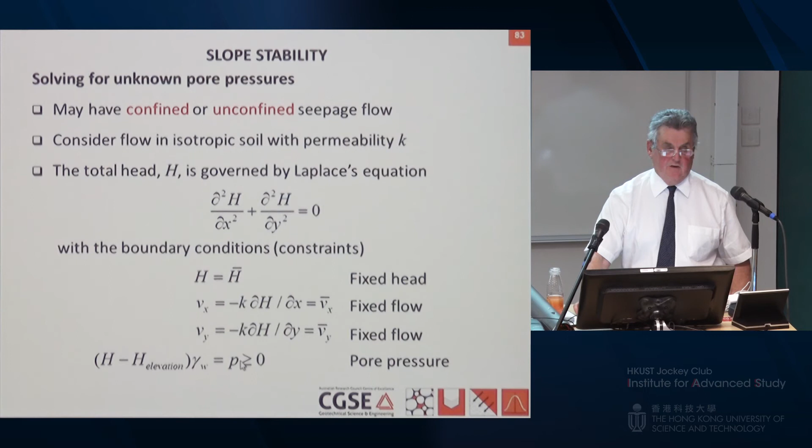How do we calculate the pore pressures? We introduce the same grid, but this time we have unknown heads. We know that for confined or unconfined seepage flow in an isotropic soil with permeability K, total head is governed by Laplace's equation shown here. Now we can solve much more complicated equations than this, but this is a simple one because we just want to show the method. That equation has typically got fixed head, fixed flow conditions on it, and you have a constraint on the pore pressure. So we're going to solve that equation with these boundary conditions shown there. Any of you who have done flow nets will know exactly.

Now it turns out that you can minimize this functional here to obtain the unknown pore pressure. So this is the head, the total head, and you solve that optimization problem, that functional there, subject to boundary conditions on the head, flow, and pore pressures.

So at the same grid that we use for the upper and lower bound, we also have another grid where we calculate these heads. We have a linear variation, so we have a single unknown head at each of these nodes, and we use the same mesh as the upper and lower bounds, but we don't have any discontinuities because we don't want discontinuous pore pressures. Let's have a look at an example.

This is a slope with a weak layer, and this weak layer has 0 effective cohesion as opposed to 28.5, and its friction angle is half. It's clearly going to have a non-circular failure surface, and we've got ponding to a depth of 1 metre here, and we've got a water table coming out about 2 metres below the crest.

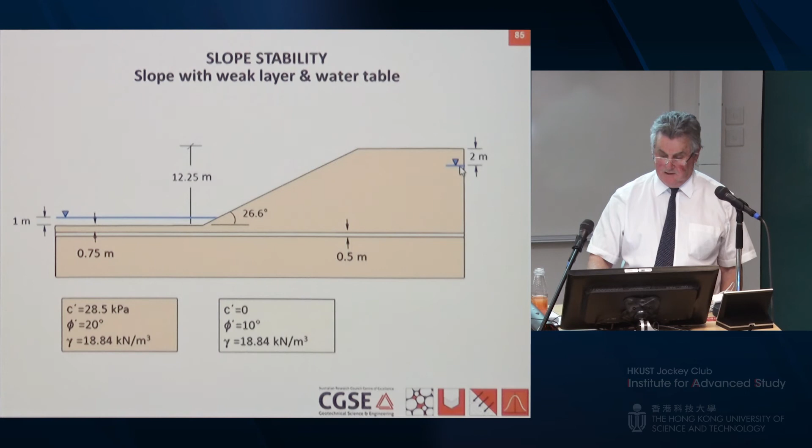Here is the grid for the final solution, where we optimize not only the pore pressures but also the upper and lower bounds. The way we do this: we do an analysis for our upper and lower bounds, calculate what element sizes we want, then do a same analysis where we solve for the heads and then the pore pressures, find out the mesh that we want, and choose the one that gives us the smallest element size.

The way that we do the strength reduction is an interesting example where we might want to optimize the unit weight. So what we do is calculate an upper bound for the unit weight, a lower bound for the unit weight, take the average to get this gamma bar quantity, and then calculate this multiplier, which is equal to the average of the upper and lower bounds divided by the actual unit weight. To get the factor of safety, we want that ratio to be equal to 1.

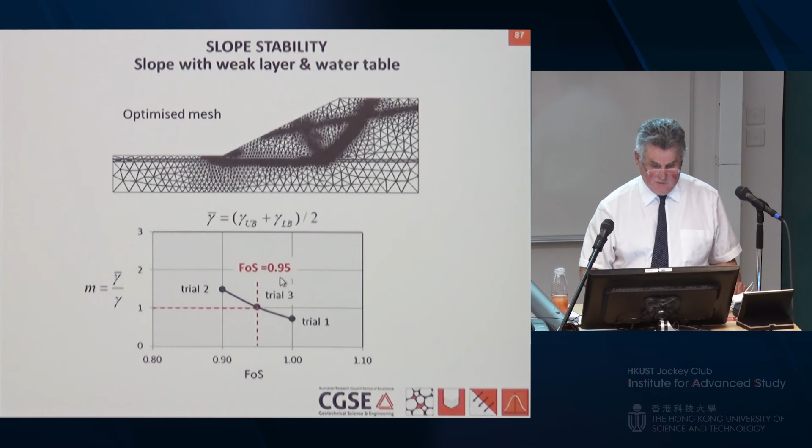You can automate that search procedure very easily, and we've done it. There are comparisons of the failure mechanism for both the case with the water table, and we also analysed it without the water table. As you can see, you get a much more extensive failure mechanism, as you'd expect, when you've got the water table.

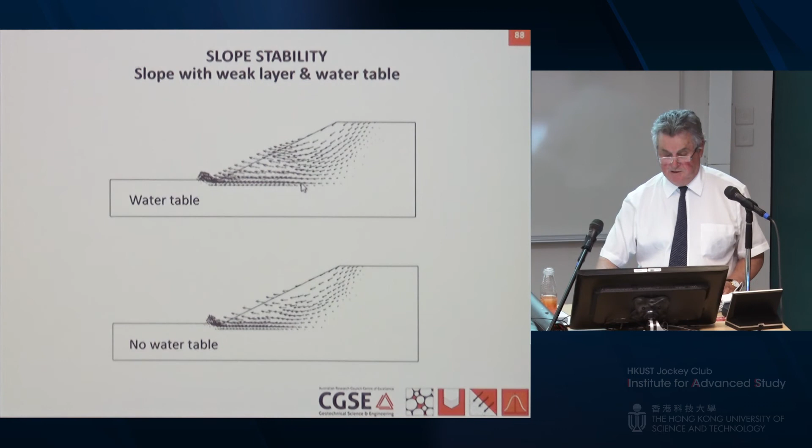They're the ones that are most rigorous because they satisfy both moment and force equilibrium on the slices. So we were very happy with those results, and we believe that's pretty close to the exact factor of safety. We did results for the case with no water table too, but I'm not going to include that today.

We also did a Plaxis analysis and got a safety factor which was substantially less. It turns out that Plaxis, when it does its strength reduction - this is a finite element code - actually reduces the dilation angle, not just the friction angle. So you're actually solving a different problem to all of these others, because you've got a different dilation angle. Just because you get a low value doesn't mean it's right.

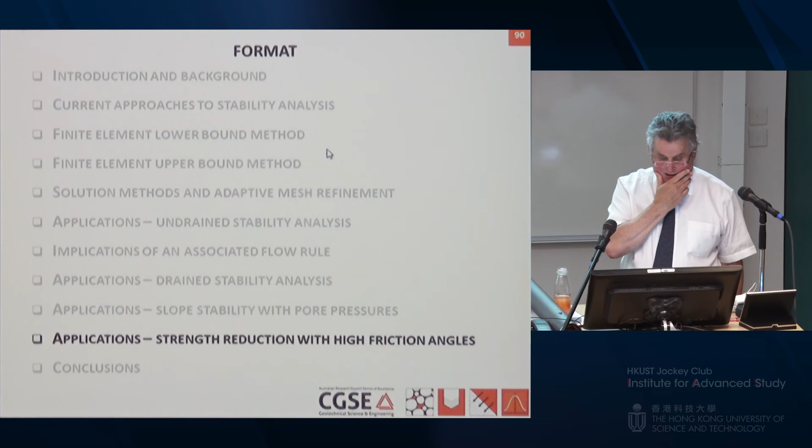I think that these values are pretty close to that exact solution for the case with a weak layer. The last example I'm going to look at is strength reduction with high friction angles. We saw that for our anchor problem we got very nice results using the simple Davis approach for the limit load. Those results agreed nicely with experimental data, but we weren't using strength reduction because it was a force control problem. What happens when you have strength reduction?

Here we looked at more recent work: a gravelly slope in alpine gravelly soil, with a slope angle of 45 degrees, friction angle high at 45 degrees, effective cohesion of 6, and a variety of dilation angles ranging from zero, the isochoric case, all the way through to 45 degrees where we got associated behaviour.

So the first thing we did was do a Plaxis analysis. This is a finite element strength reduction, SRFEA, and we looked at the deformations at this control point.

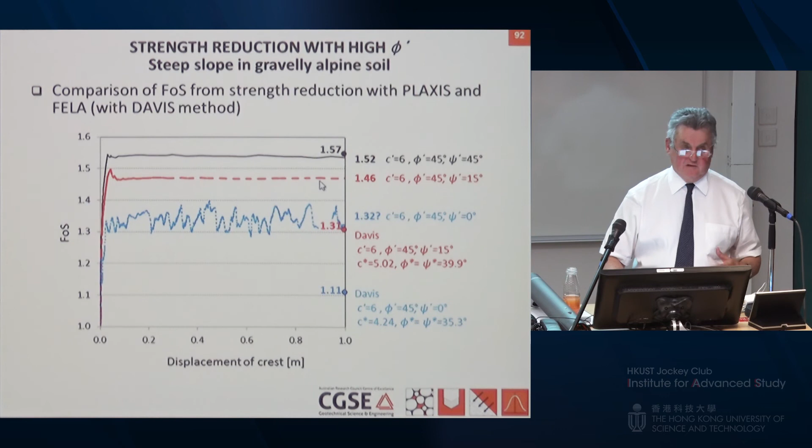So we thought, well, maybe we need to revisit the Davis approach, and maybe we need to look at that assumption where beta is held constant.

Now, those are the modified strength parameters we use when we've got a non-associated material. As you can see, beta is a function of phi. Now, if you're doing strength reduction and you've got a high friction angle, beta is not going to be constant. It's going to vary quite a lot.

So it makes a lot of sense to actually calculate the most accurate estimate of beta by using your latest value of phi, the mobilised phi, that you have in the strength reduction process. So that's what we did.

Using this formula here, all of these terms inside these arctans are simply the current mobilised friction angle, allowing for the factor of safety that you've applied to it.

So we use this formula again, but we have a dynamic estimate for beta, and we impose a condition that the dilation angle can never be greater than the friction angle, because that doesn't make any physical sense at all. So we check that the dilation angle doesn't exceed the friction angle as we reduce it. If it does, we just set it equal to the friction angle and reduce the two of them simultaneously.

That doesn't occur very often, I should add. And you can use this technique for cases where you don't have a high friction angle, but you'll find that the results are not very much affected by it. It mainly has an effect for cases where you've got gravel or a medium dense sand, where you've got a high friction angle.

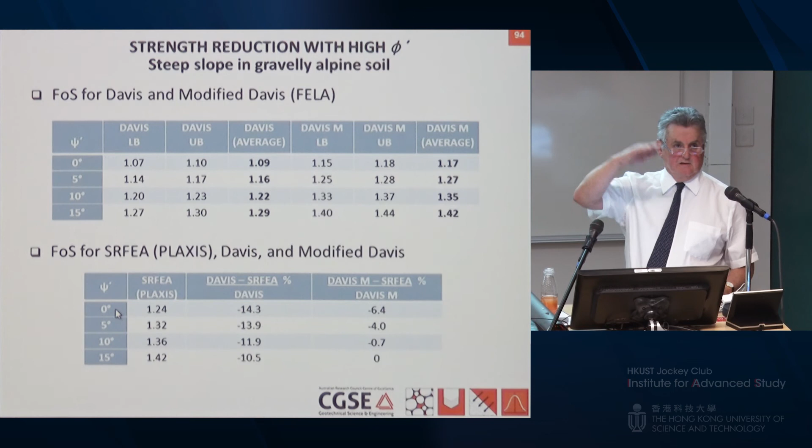We then compared the results from these two Davis methods with Plaxis and calculated the percentage difference, and as you can see, the modified Davis approach does give results that agree pretty well with Plaxis, certainly for dilation angles that are fairly realistic of 10 or 15 degrees. For these values, I'd sooner trust the limit analysis results than the finite element results, simply because you're getting those oscillations and you don't really know what the true safety factor is.

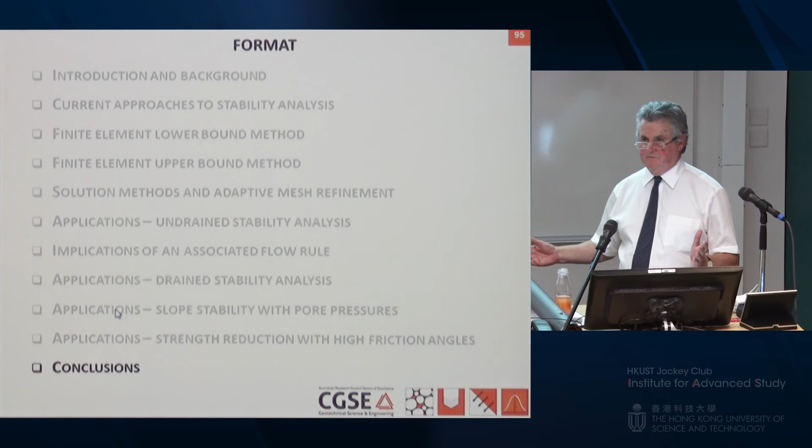So the take-home message is that this modified Davis method does allow you to deal with soils with very high friction angles if you're doing strength reduction, and you'll avoid a lot of the problems you have with displacement finite elements when doing strength reduction in practice.

To wrap up, I think one of the key conclusions is that this finite element limit analysis technique is a very powerful new tool for stability in both 2D and 3D. It doesn't require the deformation parameters, just the strength parameters. Those are the parameters engineers know the most and are happy with, and they're very simple to apply in practice. You can handle very complex conditions, such as those given there.

That bounds gap indicator allows, for each element, a very robust and efficient mesh adaptivity procedure, simply because it's calculating the contribution of each element to the gap between the upper and lower bounds.

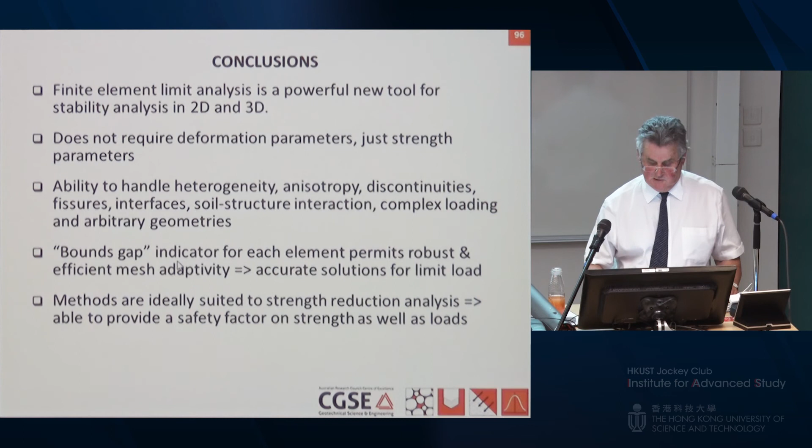The methods are ideally suited to strength reduction. You can use the technique I showed you for the slope, just doing a stepping procedure, and it's very easy to do strength reduction. It's not so easy to do in displacement finite elements, because there are a number of tolerances and convergence problems you have to deal with.

Think about it: with displacement finite elements, we normally want convergence. That's what we're looking for when we do nonlinear problems. With strength reduction, you're looking for the problem where it doesn't converge, so good luck getting that accurately. There are a whole lot of arguments about how you know when something hasn't converged, whereas with limit analysis methods, you deal with it straight off.

Not a problem. You can use the Davis material for non-associated flow for a wide range of friction angles, particularly high friction angles. We can incorporate pore pressures, which is very exciting for a lot of practical applications, not just slopes, but any sort of foundation or retaining wall problem.

I think FE limit analysis is a vastly superior technique to limit equilibrium. We should be starting to do away with those techniques. I know they're embedded in practice, but really there are better methods out there. It's going to take a while because there's a lot of codes out there that use them and a lot of engineers that use them.

In the future, we're looking at getting that 3D mesh adaptivity better. As I said, the theory is simple, but the practice is not so simple because you can get slivers and disappearing elements. We're working on that.

Also incorporating structural elements, plates and shells, to model limit state soil-structure interaction better. We've actually done some work modelling sheet pile walls, which I did with MIT. We've also been looking at modelling tunnel linings where you've got metal tunnel linings, which are really quite challenging problems, and we can look at different types of tunnel lining.